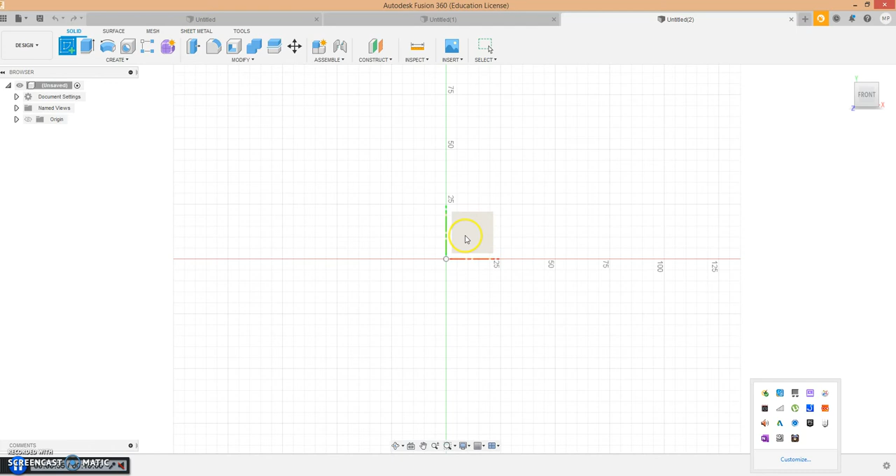The first thing we've got to do is navigate around the screen. Over here we have our isometric view, and what I'm going to look at is building on the front plane. So we click on front plane, go to this icon, drop down to this menu, and create new sketch. I'm going to sketch on this work plane. What I'm going to do is build a simple project, slice it into different components, label the components, and set it up so it's ready for engineering drawings and CNC machining.

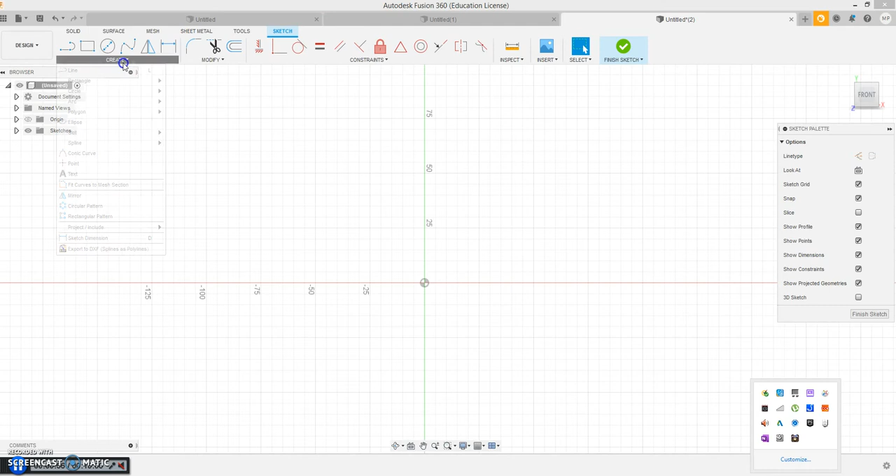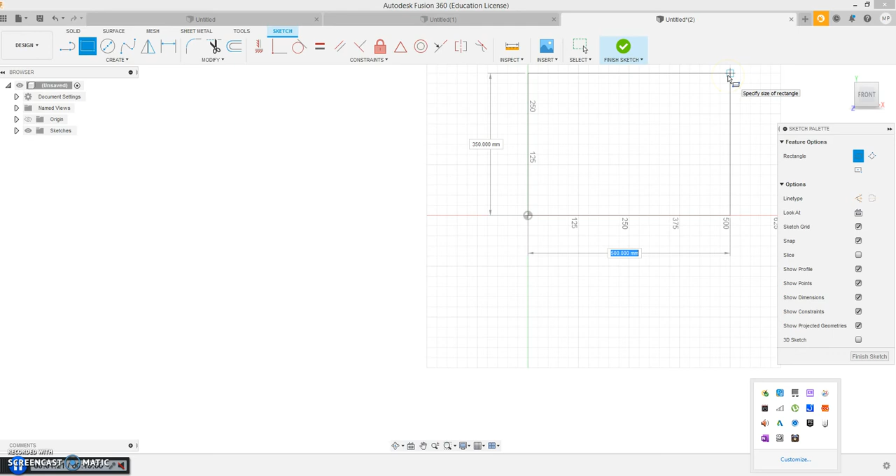Okay, so here we go. Over here I'm going to start off with a rectangle, and I'm going to go to my origin here. As I zoom in and zoom out, you can see these are my sizes. Now I want my product to be approximately 350 by 500 - those are the sizes that I've researched. So if I go back into isometric view, there it is.

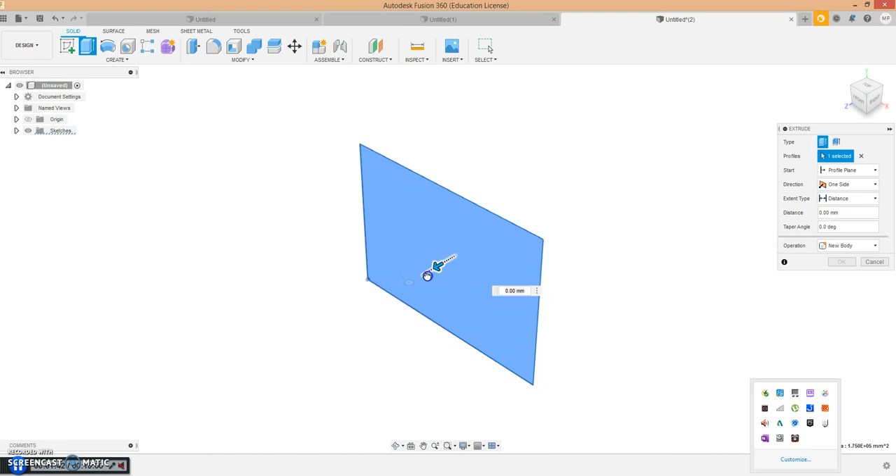I finish sketch, and then what I can do is turn this whole project into a three-dimensional shape. So I go create, extrude, select the surface, and drag that out. I know from my research my area was 600. I'm going to leave it as a new body and click OK.

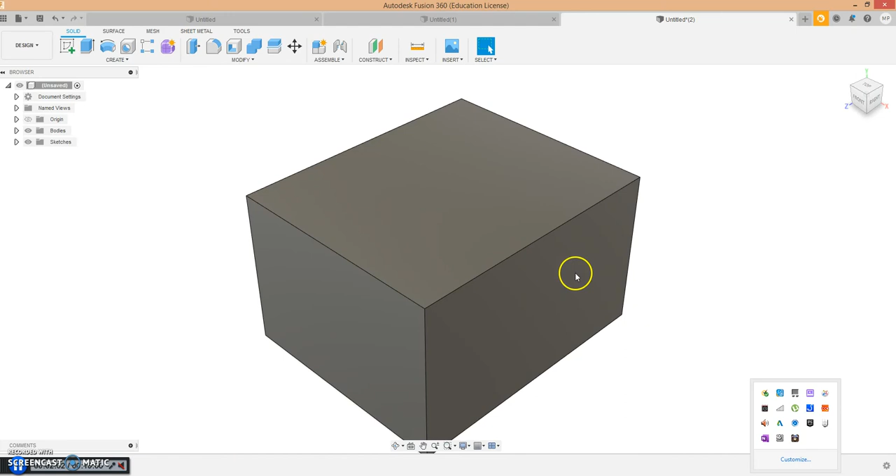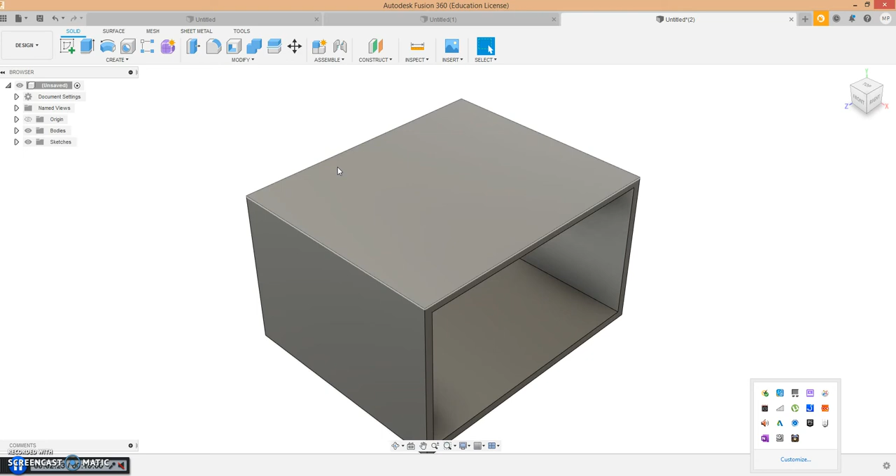Now I know the material I'm using is 17mm. Let me put that into a nice view for you. I'm going to select this surface, go to modify, and shell. I'm going to shell that surface 17 millimeters, so that means the back, the sides, everything are all 17mm. Now we can adjust the backboard to 6mm depth later. So at the moment we've got a basic shell.

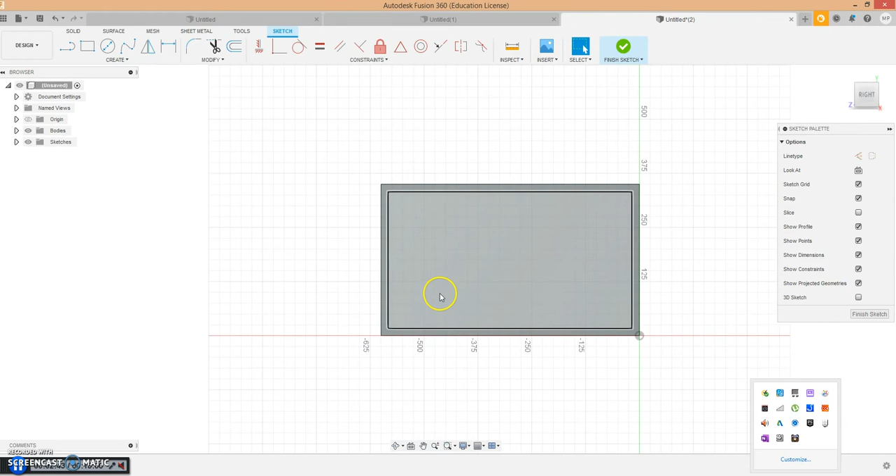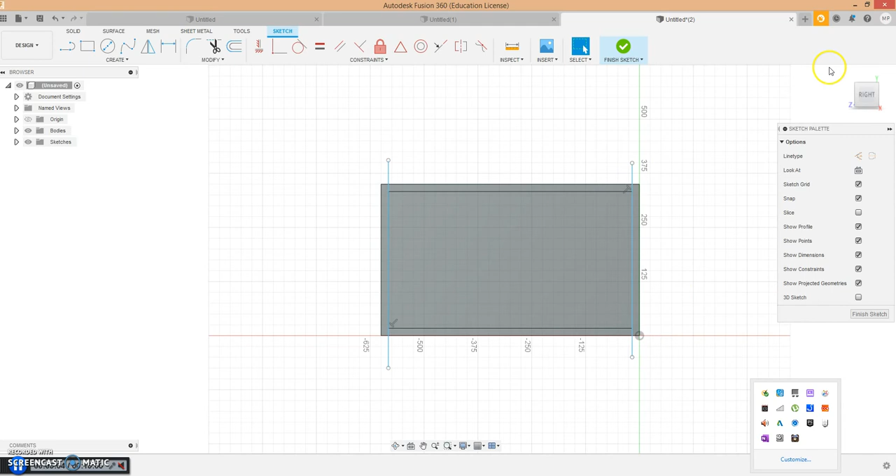Now the next stage, I'm going to draw a couple of sketches on the front. So I create a sketch and select this front face, which means I can draw on that face. I'm going to sketch a line. I pick up this edge, project it, bring it down to the bottom of the drawing, and click OK. Then I get another line and do the same here. Now if I click back into finish sketch at the end, I'm going to slice this material and turn it into different components.

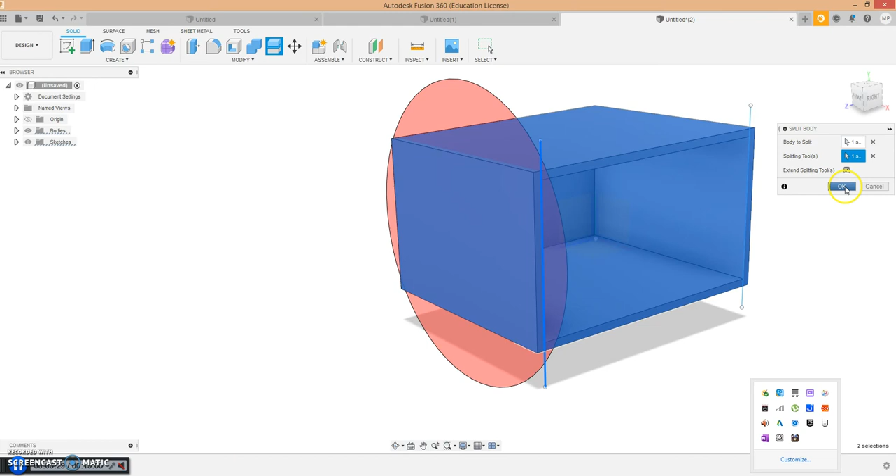The way we do that, we click on modify, split body. I click on split body, select the splitting tool, select the sketch I produced earlier, and click OK. Now you can see that's cut it.

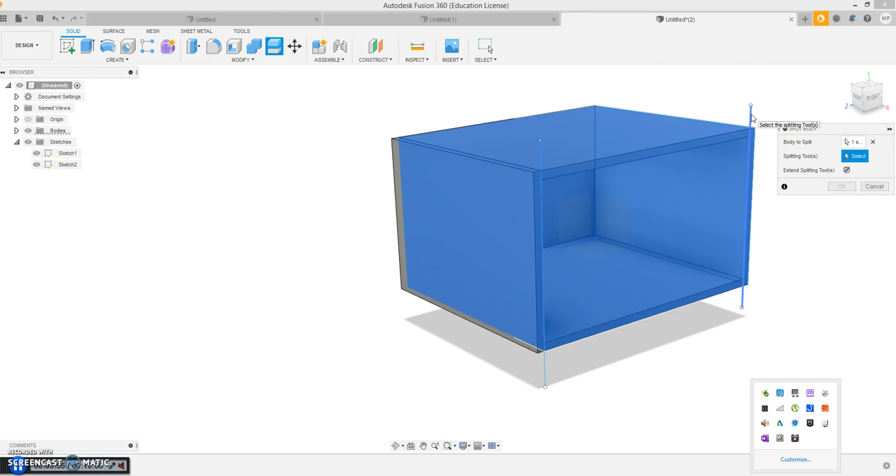I do the same again, modify, split body. I click on this surface. Now if you notice, the splitting tool sketches have disappeared - the program defaults to turn off the sketches. So I'll turn them back on, and select the line I've drawn on the right hand side of this drawing. Click OK.

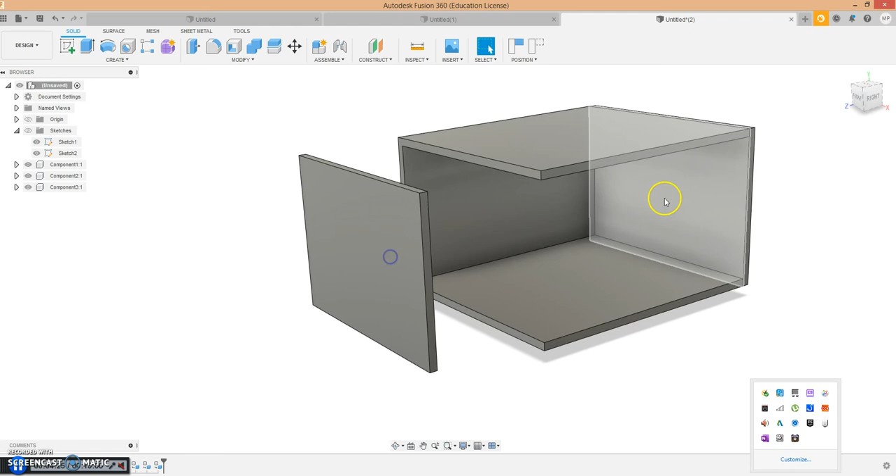Now I can then turn my sketches off. If you look over here in the window, I can turn them on or off. What I tend to do now is go into the bodies and create new component, create new component, and create new component. So by selecting new components, I can take these sides away.

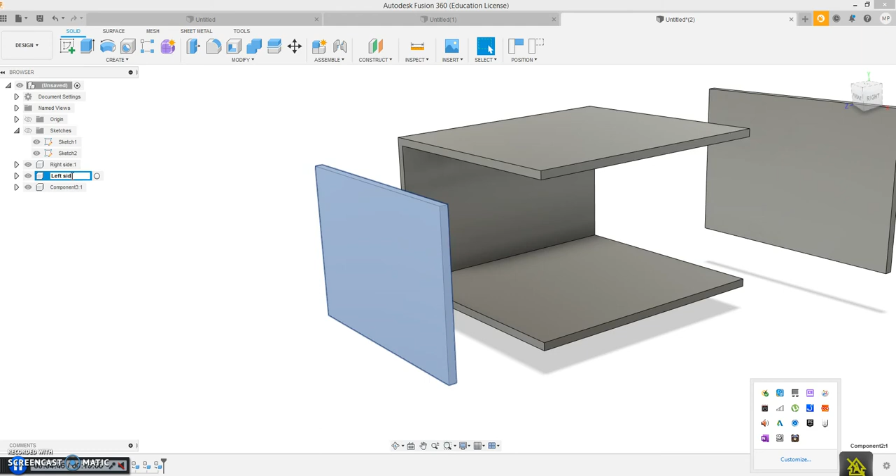If I start labeling them, I can label that one right side. Next one, I can just left click and call it left side. Component 3 I'm going to call main body. But I can turn off the left side, turn off the right side, and I've just got the main body.

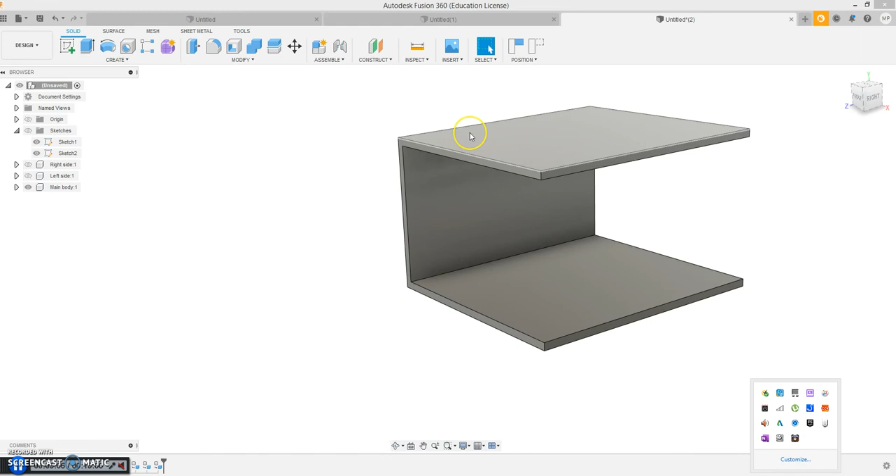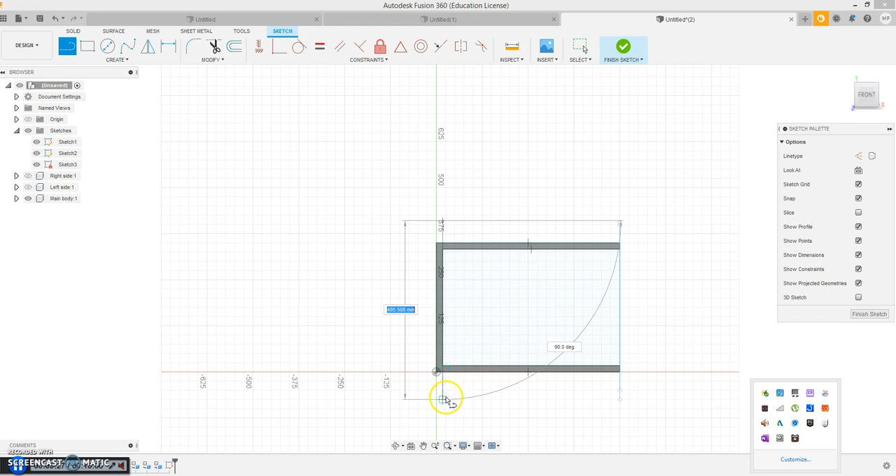Now if I want to, I can slice that as well, which is what I'm going to do. So I use the same process again: create sketch, select this surface, continue, and create a line. I do the same again, just project up, bring that down, and click OK. Isometric view, I finish the sketch, and then modify, split body.

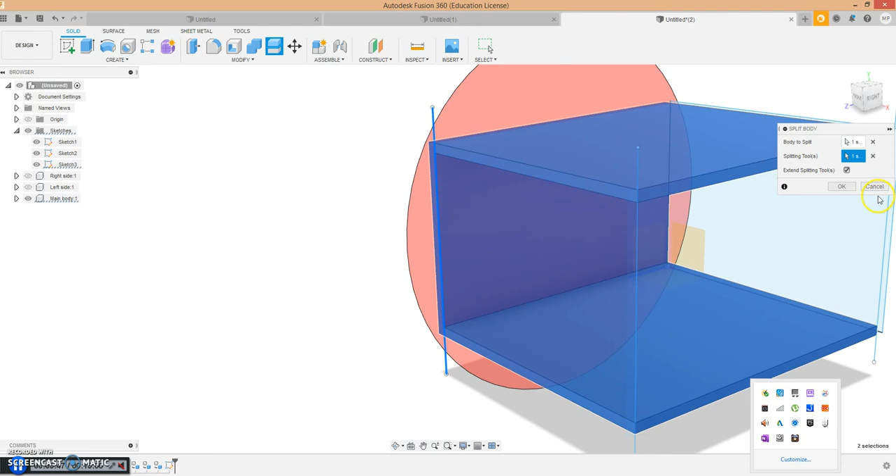So do the same process again - my sketches have gone off again, so turn them back on, and I want to slice it that way, and click OK. Alright, I turn my sketches off.

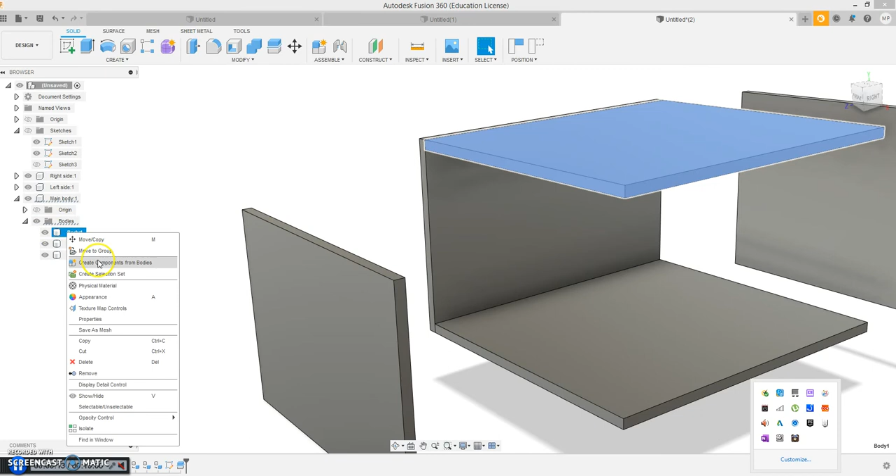Now what's happened - if you look at the main body, we've now got 3 different bodies within that main body. So I can take that one away, that one away. Now if you look at that, that's still linked. So this body here, create component, and create component. Now we've got this one in the main body.

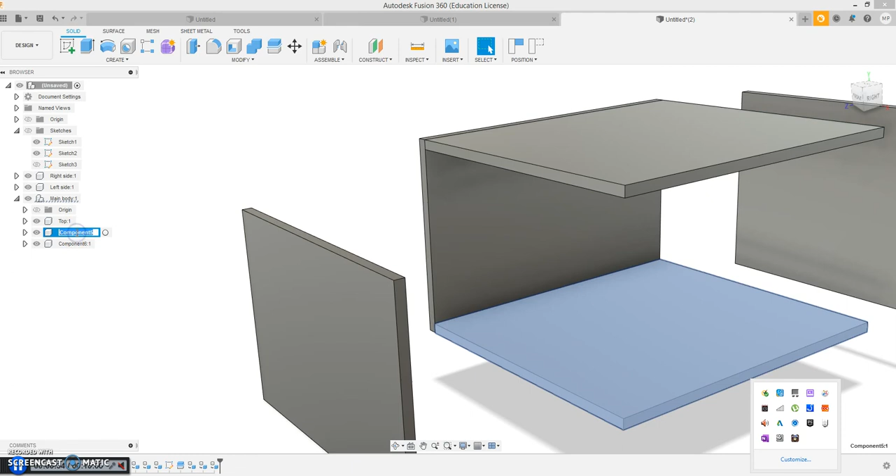This component will be called top. So this tutorial is giving you a tutorial in labeling components. This one here is called base. And component 6 we'll just call that one backboard. Now you know that I can adjust that 17mm backboard to 6mm, 9mm, whatever I fancy. But at the end of the day, I've got my product.

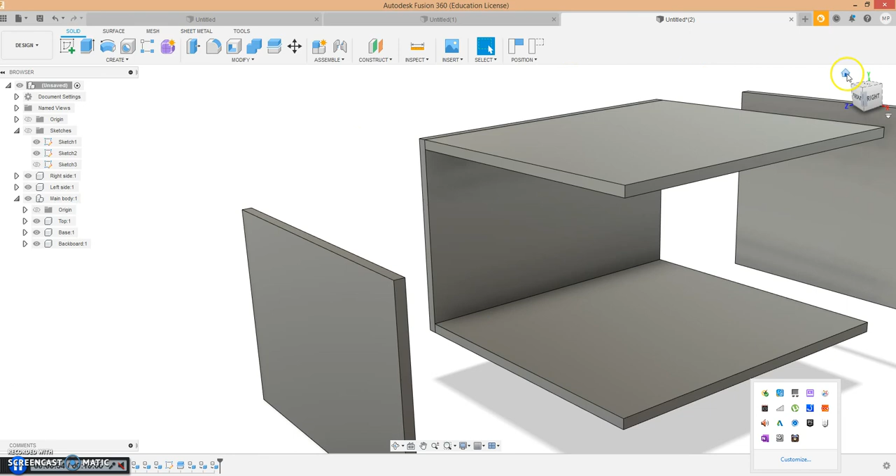So if I just go into isometric view, and if I grab hold of my tree and drag that back out, hold on.

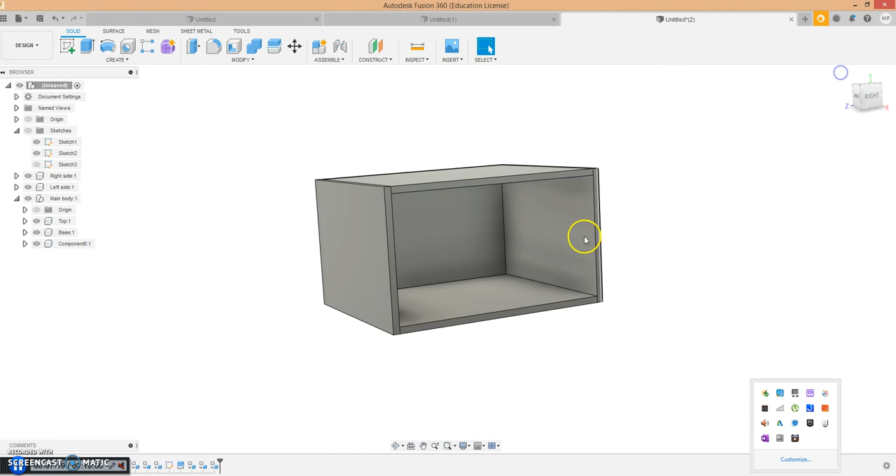There you are. If I just drag that out, that puts it back to an isometric view. Now, what you can do as a student, you can move all of the components out of the way. That comes in handy for visualizing how you're going to join it together, and also very useful if you're producing an engineering drawing.

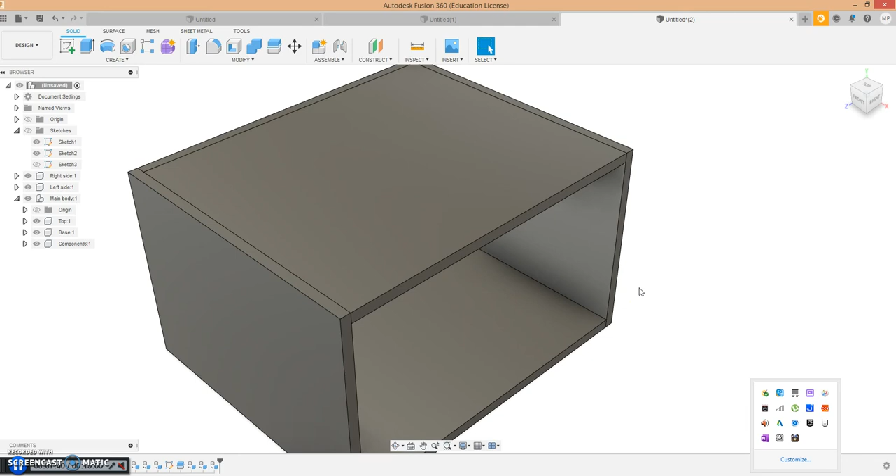Okay, so that's just the basic shape. Now if I want to add extras, like some feet to the project or some shelving, that's very interesting indeed. If I want to add some shelves, I can do this.

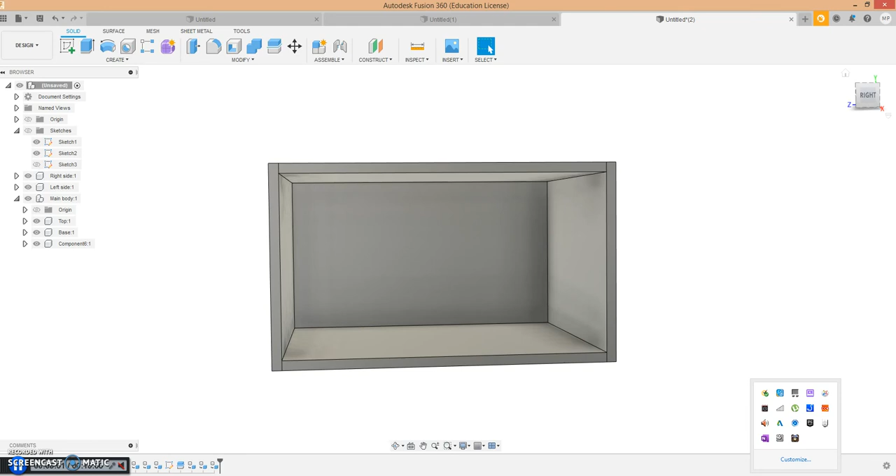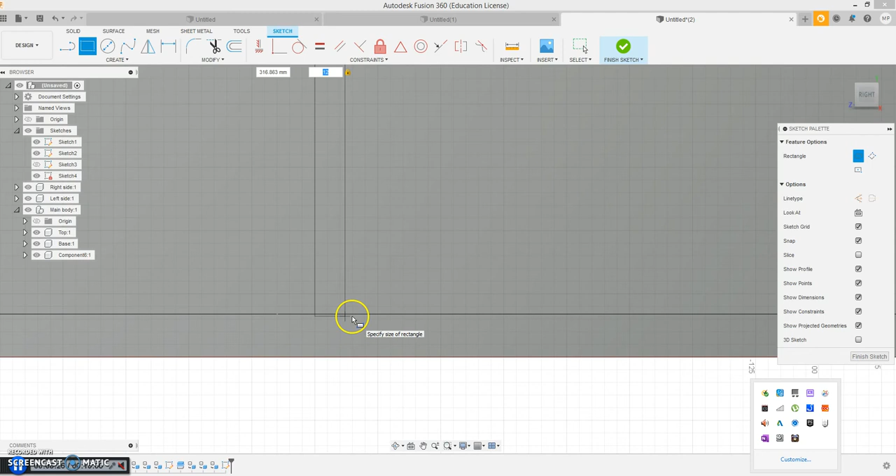Create a sketch, and I'm going to build on this surface again. Now I create a rectangle, 2-point, and I'm just going to pull that across like so, and I can set this to 12mm. Click OK, and if you notice, I've gone oversized a little bit there, which is what I want to do. I create another rectangle, 2-point.

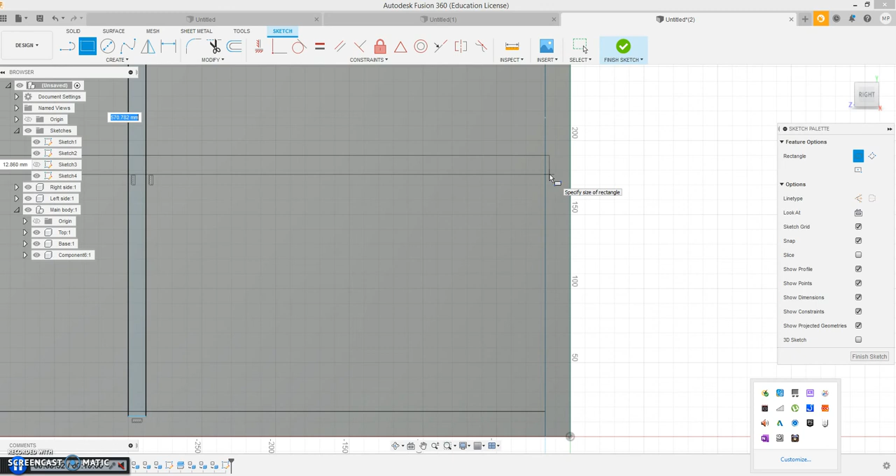I can come in here, and I can do the same. Click OK, so I finish my sketch. I turn my sketches on, the ones I've just created, and now what I can do is modify and create extrusion. I can select this.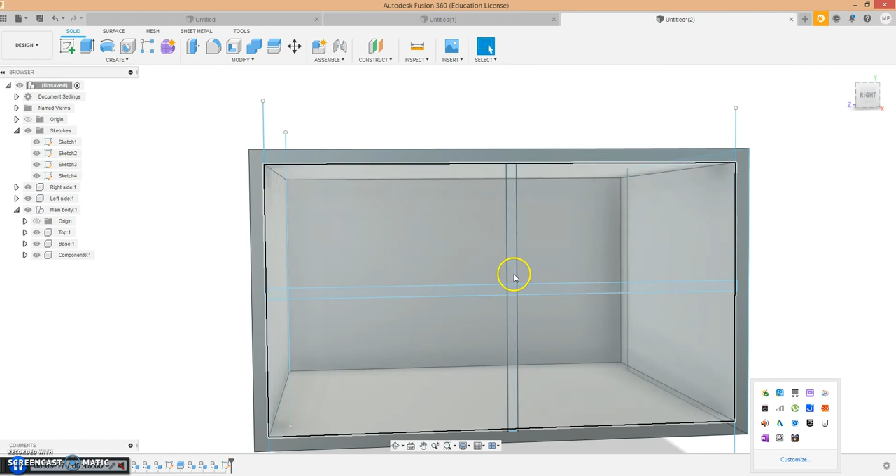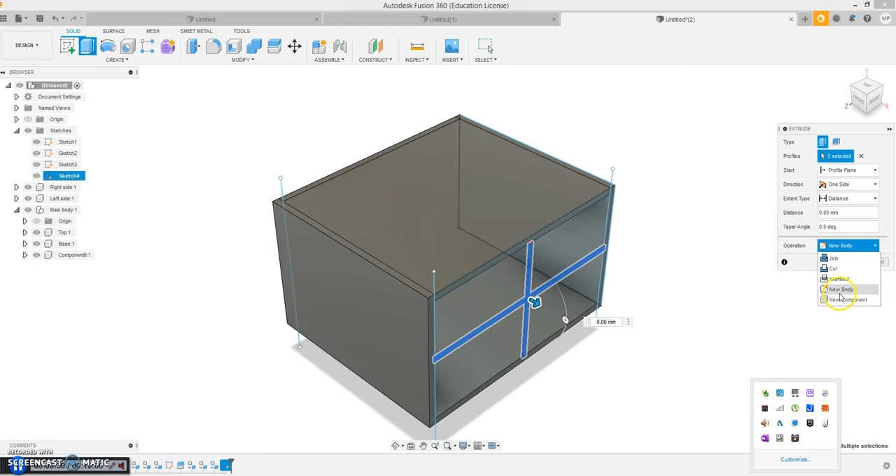1, 2, 3, 4, 5, and 6. And what I can do now, I can create extrusion, and create new component, and the whole item then can go right through. We're through there. There you go.

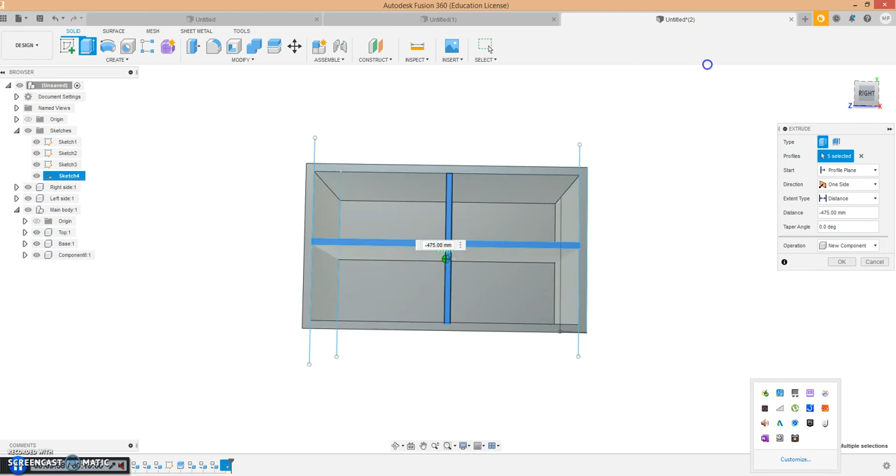475. Let me just double check there's no gap at the back there. Yep, a good position, so I can click OK. And what I've got there is a project with different components. Now, I've just overlapped them, I've turned the sketches off, and now I've got myself a sort of box with a couple of sides. Okay, good.

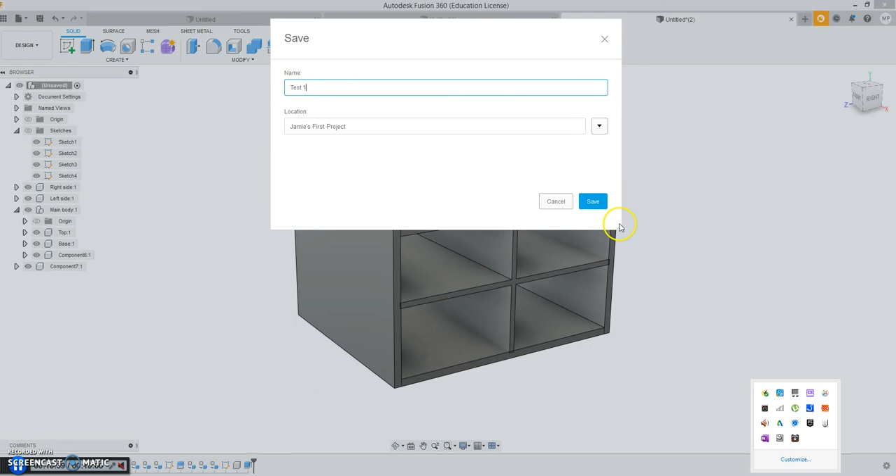And that's just the start of the tutorial. Once I've done that, I click Save. I'll save it as test 1. Save. Then what I can do is take that design into a rendering program.

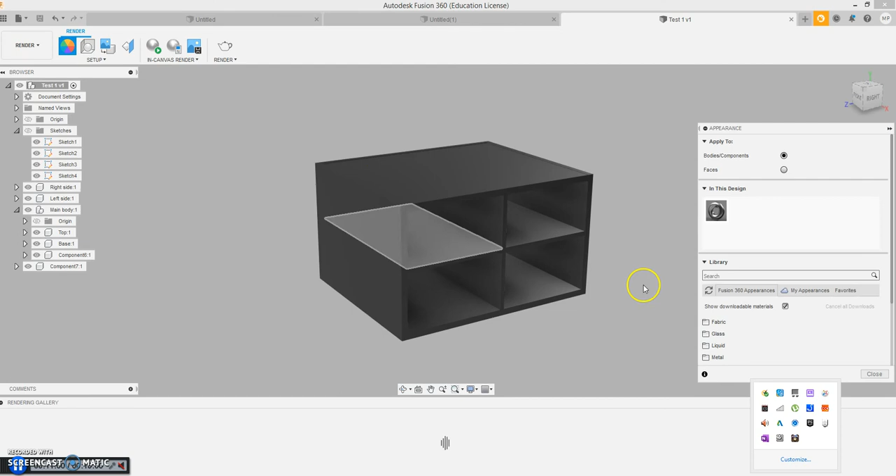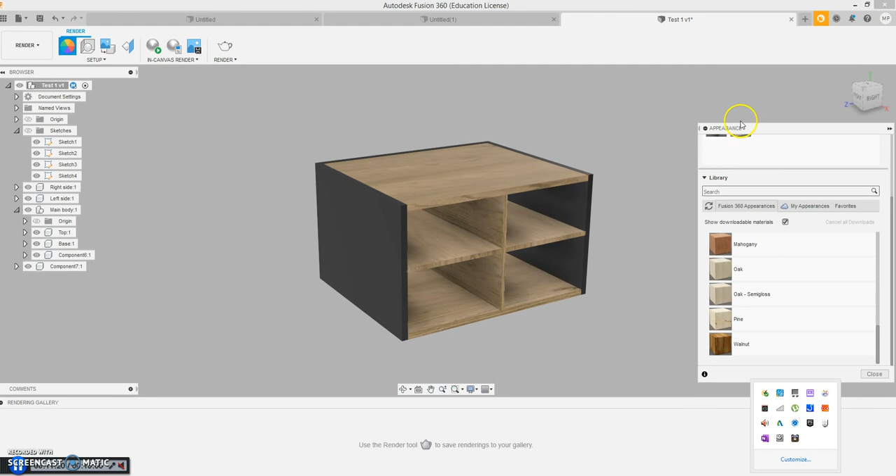I can apply color. So in the color options, I just tend to go for paint, or if I want to go for wood, I can choose wood. Okay, oak semi-gloss, so I can place oak semi-gloss onto that surface, oak semi-gloss onto that one, and oak semi-gloss into that whole unit, and I might leave the rest of it grey. Okay, I might leave it like that. It's totally up to you what you do with your colours.

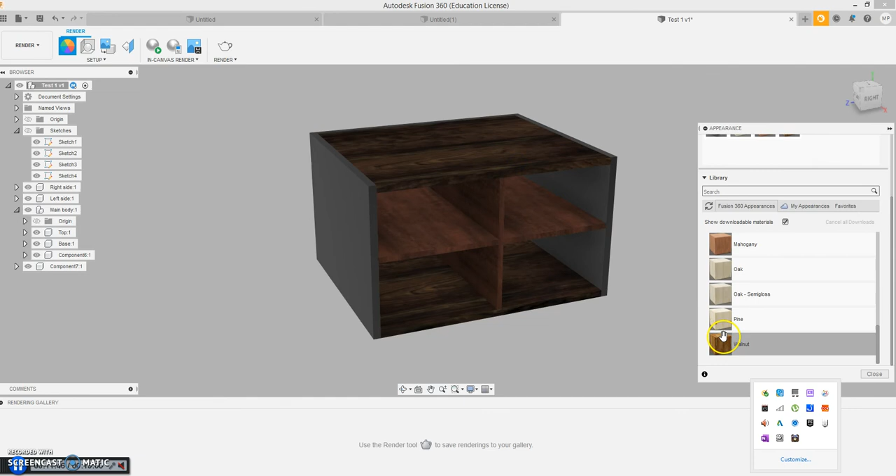If you don't like that and you want to change it, I can change this to mahogany, top to mahogany, and the bottom to mahogany. If I'm not happy with that, see what walnut looks like - very dark indeed. You can see it looks like it's disappeared into the surface. But if you look at that now, it looks pretty good.

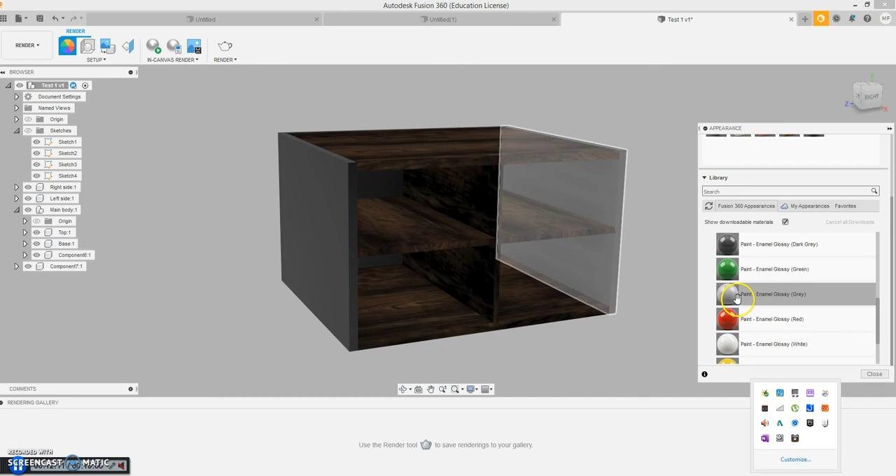If I apply some paint, okay, if you're getting parts of it spray painted, I can go for glossy paint. And now I'm going to change the colours, so I'm going to go for dark grey. Right, and that's already standardized grey.

If you look at that, you can see there, the light grey - that's better. So if I've got light grey on the outside, I probably want light grey on my inside component too. So now you've just got the walnut top and bottom.

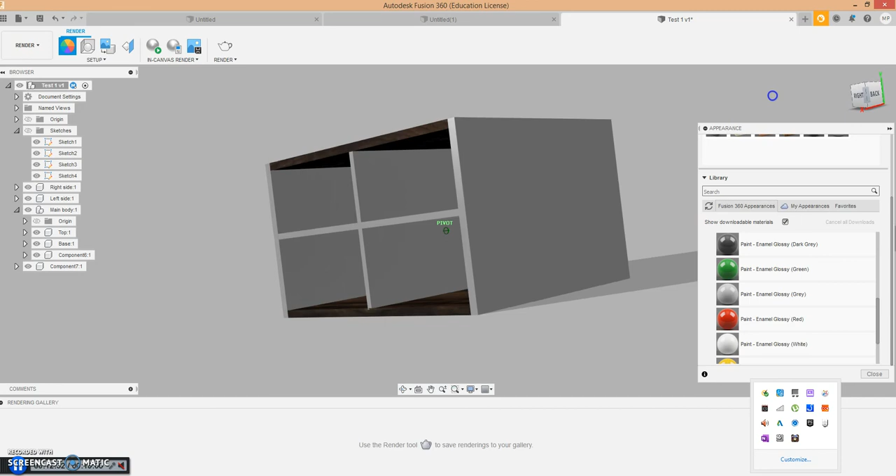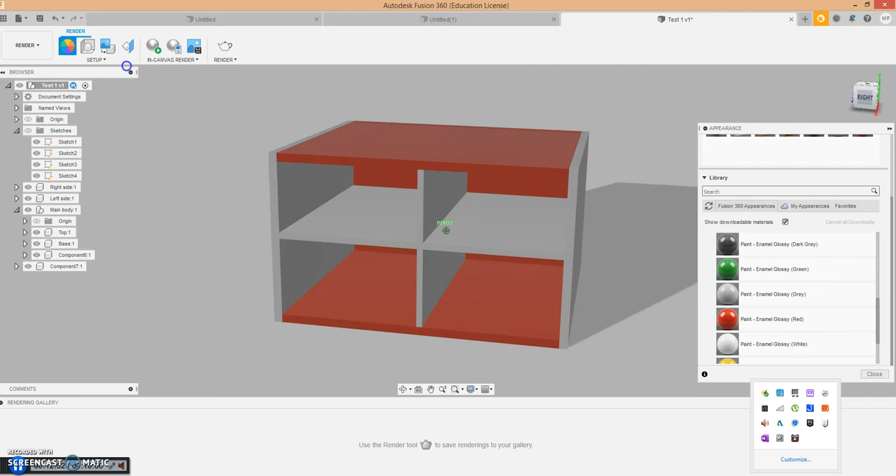Similarly, I could change the colours. I could change that to red paint, that to red paint, and the back I could also change to red paint if I wanted to. So I've got a colour coordinated cabinet. Now these are things that you can play around with, but again, it's just a very basic look into using the program. Okay, let's go back into here.

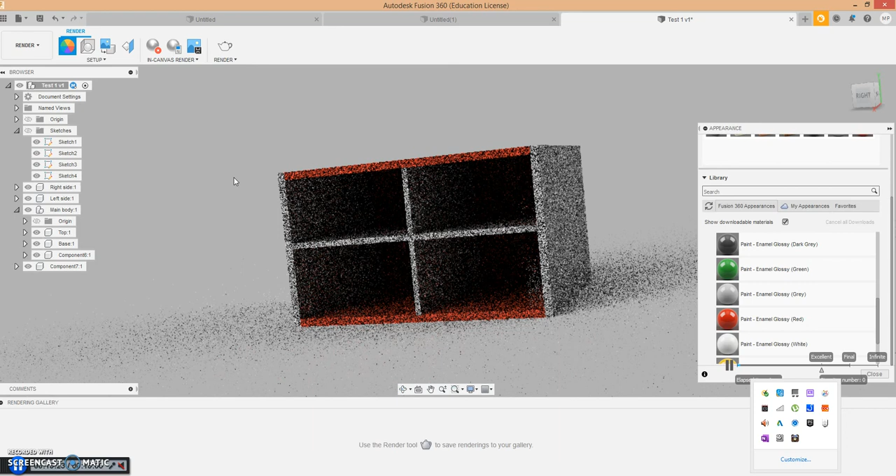And if I want to, I could render it. I could just click on In Canvas Render, like so, and that will start rendering and making it look photorealistic. Okay, that takes a bit of time, so I'm just going to stop that.

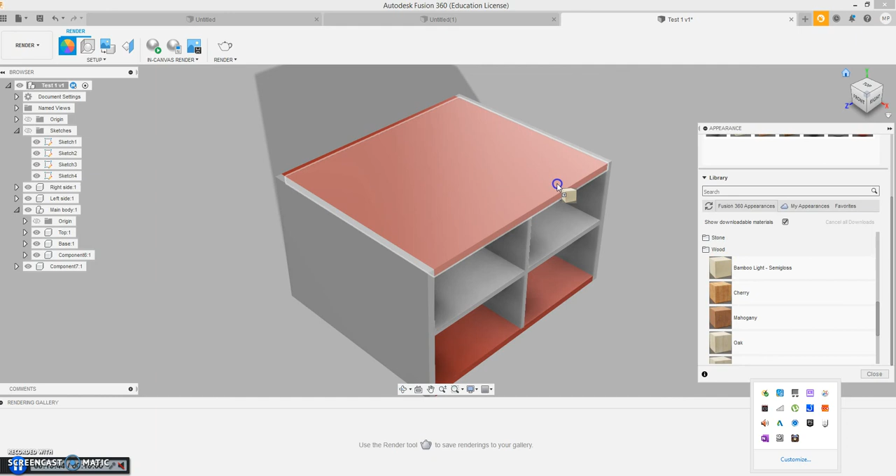Isometric view. I'm going to put it back to something that I would probably use if I was going to do this myself. I would go to wood, bamboo - that looks better. Bamboo base, and I'll go for a bamboo back. So look at that. So that's just a basic introduction into using the software, and that will help.

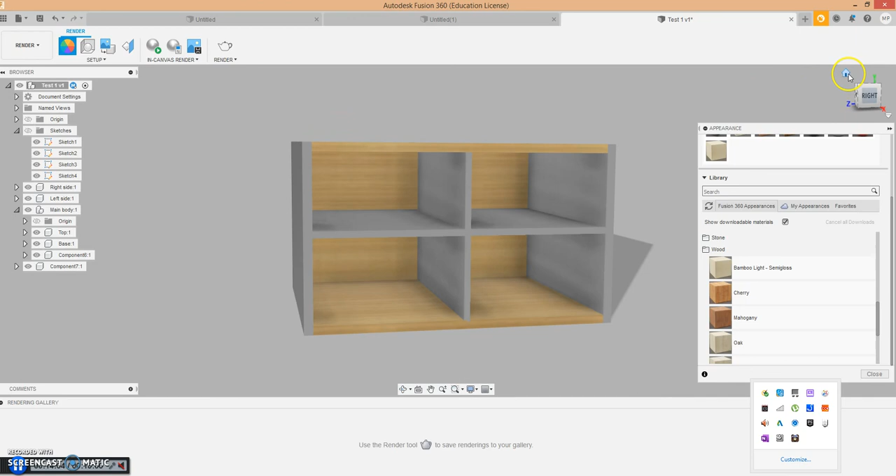That'll help you. But the most essential things you need to understand from the beginning are all of your dimensions, your X, Y, and Z dimensions. Those are very important, and then you can start designing.

Now you know I've gone for a simple rectangular box sort of shape. Well, of course I am, because you can see in that short space of time I've managed to produce a product with different components. I've labelled them, and that should work out well. So if you can do that, you'll be able to design and use the software on your own without my help. And that's what we call teaching.